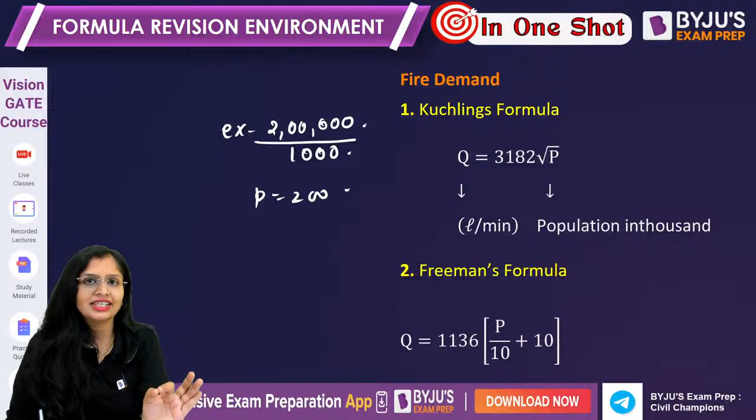As I told you, again, in every formula, P is population in thousands, discharge is in liters per minute. One more case, guys, I have told you this before also. If it is 1136.5, that time you will take here P by 5 plus 10. Otherwise you won't. Okay, remember that.

Then National Board of Underwriters formula. Guys, if the population is less than 2 lakhs, the formula is 4367 or 4637, guys? National Board of Underwriters formula. Is it 4367 or 4637? I made you solve it, so don't tell me that I haven't taught you. Come on, guys. Lashya, Yukta, everybody. Prince.

Good. 4637 root P (1 minus 0.01 root P). Here also you will get the discharge in liters per minute, and the population is in thousands.

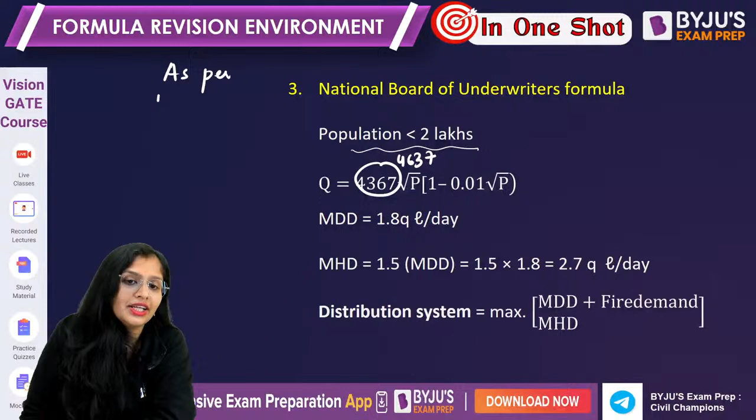One more formula, till now they have not asked, but if in GATE they want to ask, as per IS code, fire demand is given by 100 root P. Here you will get the fire demand in kiloliters, and the population will be in thousands. So put the population in thousands and you will get the fire demand in kiloliters.

Okay, prior to 2012 we used to use 97 root P. Right now we use 100 root P. So this is the formula for fire demand. 100 root P. Correct, Saurabh.

Now, next is maximum daily demand and maximum hourly demand. Maximum daily demand means out of 365 days in a year, there will be one day when the demand of water will be maximum. It is given by 1.8 Q. Ma'am, what is Q? Q is annual average daily demand. That means P population requires how much water in one day. If one person requires 200 liters of water, 5 lakh people will require how much? So 5 lakh into 200. Here I have denoted it by Q. This is not a hard and fast notation.

Okay, maximum hourly demand. Out of 365 days, there will be one day when the demand of water will be maximum. And in that day also, there will be 1 hour when the demand of water will be maximum. That will be known as maximum hourly demand. Technically, it is maximum hourly demand on maximum day. So this will be equal to 1.5 times MDD. Just substitute the value of maximum daily demand, 1.8 Q, and you will get 2.7 times annual average daily demand. So MDD and MHD.

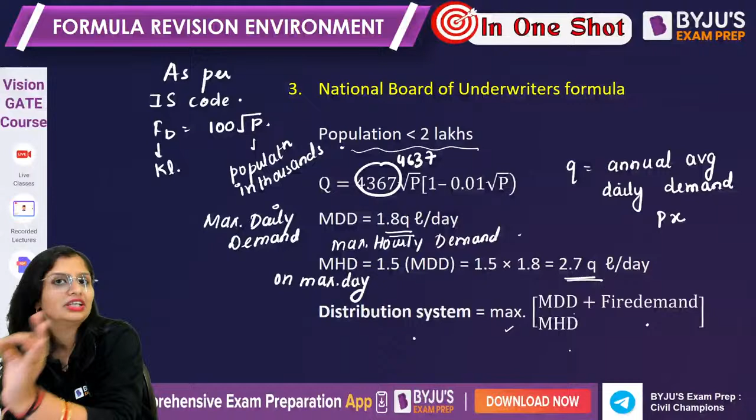So that hour on the maximum day is known as maximum hourly demand. So maximum hourly demand on maximum day. Clear? Okay. So for the distribution system, maximum of both of them.

Now, if you talk about population forecasting methods, what you are doing is predicting the population. Because when you design canals and all, you will design it for, let us suppose, 10 years, 15 years, 25 years. So you need to predict the population. Now you can ask me, ma'am, why are you not designing it for the existing population? It's pretty much sure that next year India's population will increase.

So if I'm designing it for the current population, it is pretty much sure that in the coming year the population will increase and my water distribution system will not be able to fulfill the requirements of the people. So it will become the failure of the engineer. That's why we forecast the population. We predict the population.

So the first method in this is the arithmetic increase method. Pn, I'm writing just once because for every other case it is the same. Pn is the population after n decades for which you are forecasting. Decades means 10 years; one decade is equal to 10 years. P naught is the last known population as per the latest record of census.

Census means Janganna in Hindi. After every 10 years they come to your home: how many people, how many are male, how many are female, how many are employed, how many are educated, all those things. So that is census. So last known population as per latest record of census. N is the number of decades and X bar is the average increase in population.

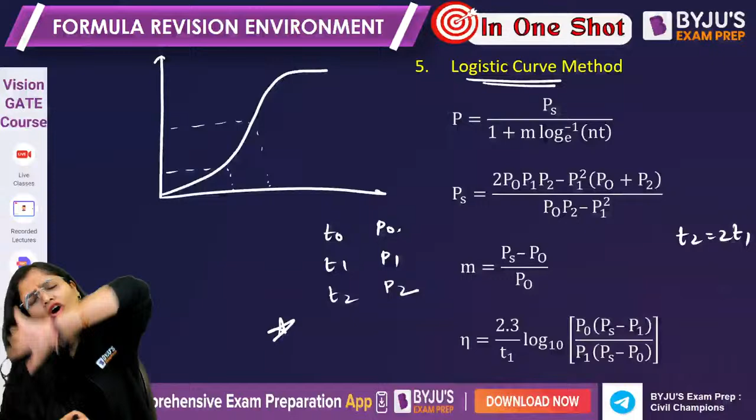I told you one thing. Logistic curve is valid when? Come on, guys, answer me. Logistic curve is valid when? Very good, Anwar. T2 is twice of T1, and all calculations are done from the base year. Out of all the population forecasting methods, it is only in the logistic curve method that all calculations are done from the base year. All the calculations.

Now, what is the formula? If you want to forecast the population, generally I don't write this formula. I told you to remember this one: 1 plus m e to the power nt, because this won't be possible for you to calculate in the calculator, right? So P is equal to PS over 1 plus m e to the power nt. And what is PS? PS is the saturation population: 2 P naught P1 P2 minus P1 square (P naught plus P2), over P naught P2 minus P1 square. So at T equal to 0, P naught; T1, P1; T2, P2. So this you have done.

Okay. Now m is a constant, which is saturation population minus initial population at T equal to 0, divided by initial population. n is again a constant, 2.3 over T1 log base 10. Guys, if you don't want to use log base 10, you can use this formula: 1 upon T1 natural log of P naught (PS minus P1) over P1 (PS minus P naught).

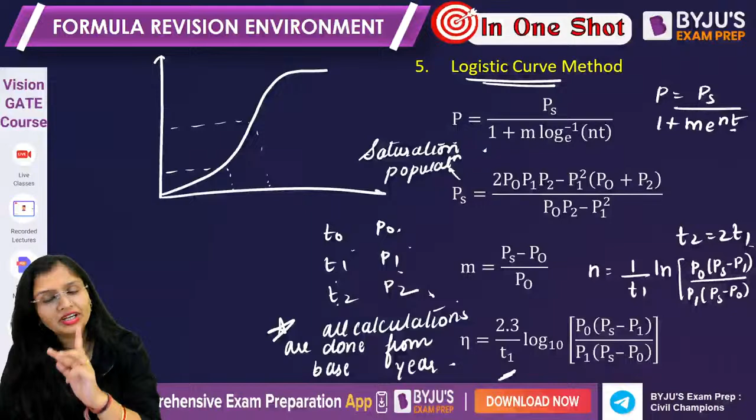Okay, this is the formula which you can use. Fine. So this is the formula which you can use. Now, obviously, if you want to use log base 10, you have done 2.3. That's it. Nothing else. Clear? So these are the simple formulas which you can apply and you will get the answer. I have put everything in decades everywhere. If I am putting decades here, I'll put decades here also. So every time, all calculations from base year. Remember that.

Okay. Any doubts from the first chapter? Now we are done with the first chapter, all the formulas. Any doubts? Quick. Hello, Prithvi. Any doubts from the first chapter, guys? Is my speed okay? Am I going fast? I just want one thing to know from you. Is my speed okay? Is my speed okay or am I going fast?

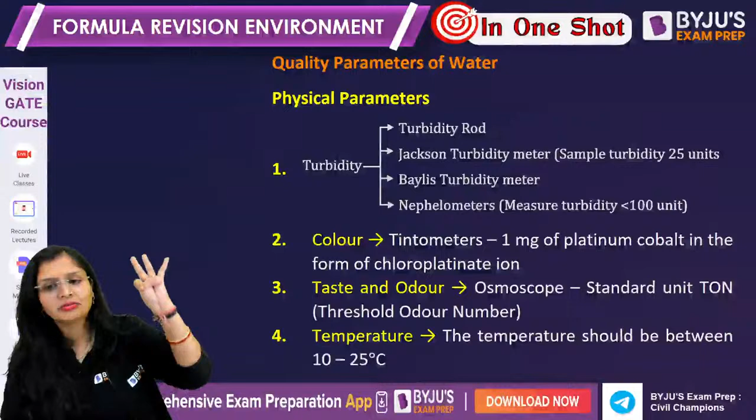Okay, fine. Now, talking about quality parameters of water, in a broader sense we have three types: physical water quality parameters, chemical water quality parameters, and biological water quality parameters. When you talk about physical water quality parameters, physical is something which you can touch, feel or see. So the first physical quality parameter is turbidity. Turbidity is basically the extent to which light is either scattered or absorbed. You have four methods in this: turbidity rod, Jackson's turbidity meter, Baylis turbidity meter and nephelometers.

Can you tell me, out of the four, only one is a field method? Which is a field method for calculating turbidity? Turbidity is the extent to which the light is either scattered or absorbed. More the suspended solids, more the turbidity. Lesser the suspended solids, lesser the turbidity.

How to get 30 marks in 10 days? I'll tell you how to get 30 marks in 1 day. Okay, wait for 1st of Feb or 3rd of February. Very good, Yukta and Anwar.

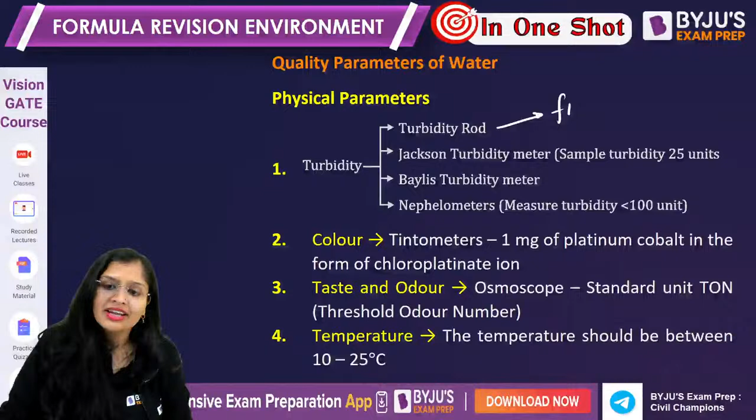Turbidity rod is the only field method to get instant turbidity. You put that rod, aluminium rod with a platinum needle, and you will get the answer. So turbidity rod is the field method used for measuring turbidity. Jackson's turbidity meter, you use it for natural water bodies because it gives you turbidity more than 25 units. Generally, turbidity more than 5 units is visible by the naked eye. So why use Jackson? For natural water bodies, you do it.

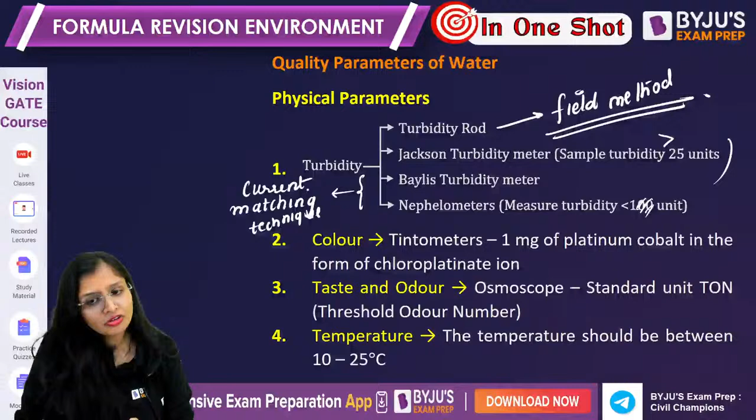Baylis turbidity meter and nephelometers can give you turbidity less than 1 unit. They are based on the matching technique, because while doing the measurement, you do the matching. Now, nephelometers: generally nowadays we put formazine in 1 liter of distilled water and check how much color is imparted.

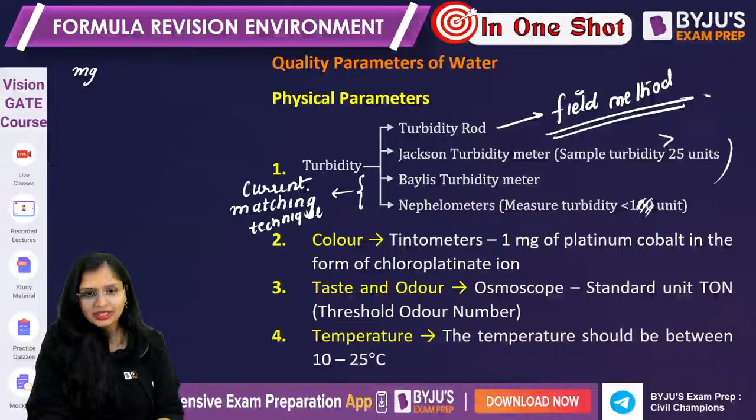So the unit, I told you this, again I'm repeating this question: mg per liter, ppm, NTU, FTU. Which one is the most appropriate, guys? I want the answer once again. Which one is most appropriate? Come on.

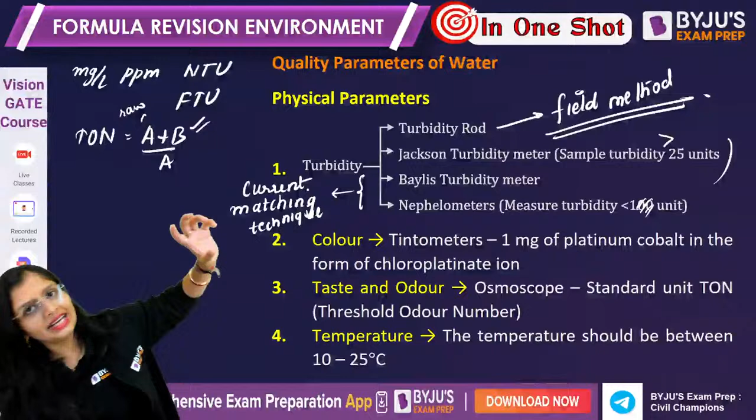Then talking about taste and odor. Obviously these are two different physical parameters, but we take them as one because the thing which imparts taste also imparts odor and vice versa. The equipment used is generally for odor, because you cannot taste the water, specifically if sewage is there. So the equipment used is the osmoscope, and the unit to measure the intensity is threshold odor number. Threshold odor number is (A plus B) by A, where A is the volume of raw water, and you keep adding distilled water, B, till no smell comes.

Talking about temperature, keep the range around 10 to 25 degrees Celsius. And always remember, whenever you take a sample, do the testing within 72 hours, meaning within 3 days. Why not after 3 days? Otherwise the biological and chemical parameters of the water will change. That is the reason, do it within 72 hours.

Now talking about chemical parameters, what do we have? We have total solids. Dissolved solids is basically a chemical parameter. Total solids is the summation of suspended solids plus dissolved solids. Suspended solids you can measure by gravimetric technique: take 1 liter of the sample and pass it through a filter paper.

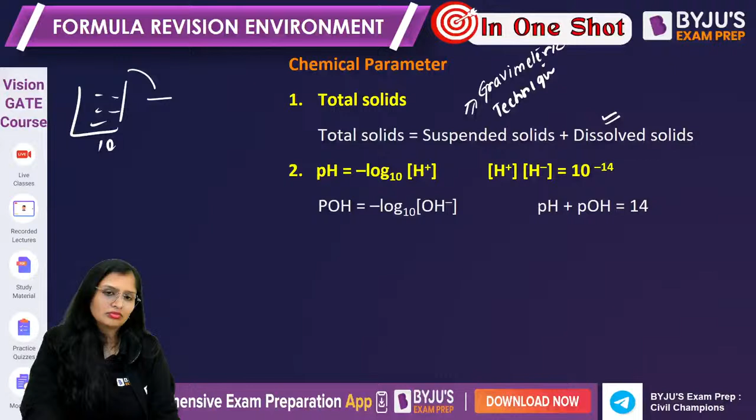Suspended solids will retain. Put it at 104 degrees Celsius for 24 hours. Water will vaporize, and you will get only suspended solids. Similarly, whatever sample has passed through the filter paper, whatever solids have passed through the filter paper, take it, vaporize it at 104 degrees for 24 hours; water vapors will go and you will get the dissolved solids.

Okay, now talking about TON, it generally varies from 1 to 3; that is wrong. I'll tell you that. Wait, at the end I will talk about it.

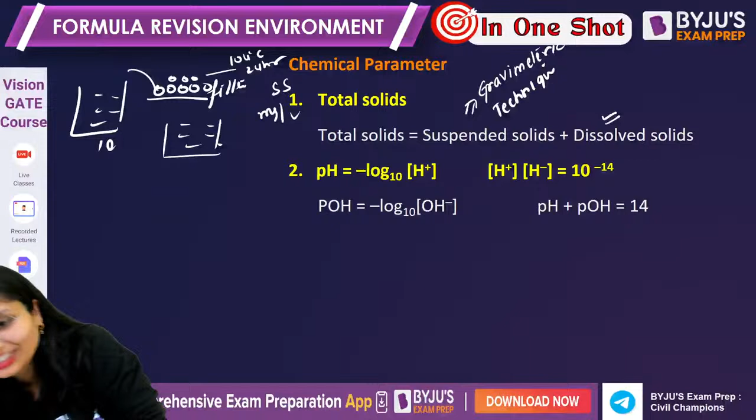Okay, so at the end I'll talk about the limits. Right now I'm not talking about the limits. pH will tell you the acidity or the basicity of the sample. pH is given by minus log base 10 of H+ ions, where H+ is the concentration in moles per liter. Similarly, if you want to measure pOH, that is minus log base 10 of OH- ion. OH- ion is again in moles per liter.

The summation of pH plus pOH will give you 14. And if you multiply H+ into OH- ion, it will give you 10 raised to the power minus 14. Very, very important, guys. The only thing where you can make a mistake: kindly substitute H+ and OH- in moles per liter. What is moles? Given weight upon molecular weight.

Suspended solids only inorganic particles? Suspended solids have both organic and inorganic particles. Who said it is only inorganic? Okay. So this is the number of moles per liter.

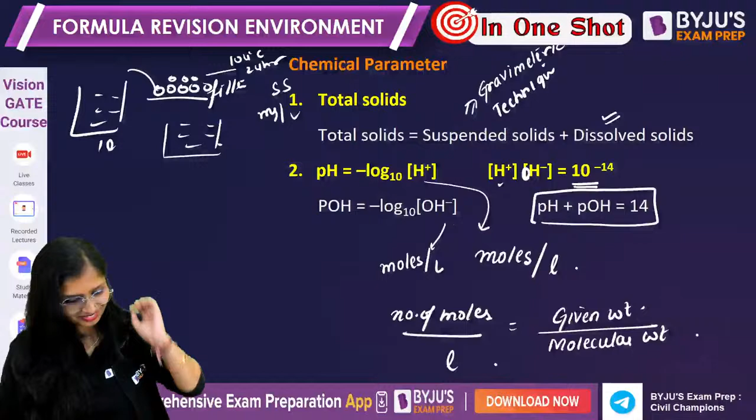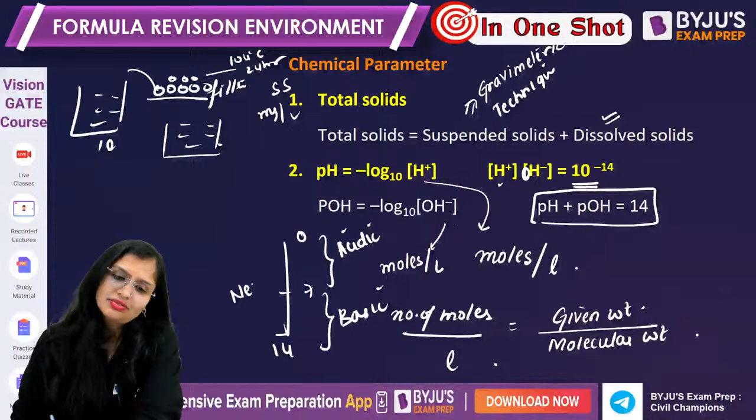pH tells you whether the water is acidic or whether the water is basic. How? If the pH falls from 0 to 7, you will call it acidic. And if it falls from 7 to 14, it is basic. And at 7, it is neutral. Okay, so this is the one.

Now talking about hardness. Hardness in water is due to the presence of what? Why is there hardness in water? Tell me the answer first. Hardness in water is due to the presence of multivalent cations. First of all, cations are positively charged ions.

Multivalent means... see, again a mistake, Saurabh, Prince, everyone's mistake. Meaning nobody told me correctly. Only Giri has told correctly. Shravan, multivalent cations, correct. First of all, cations are positively charged ions. I'm feeding it into your mind.

The reason I'm not saying calcium and magnesium is because if the question gives you aluminium and does not tell you to neglect the minor ion concentrations, then you have to consider aluminium also. So that's why I'm feeding it in your mind. It's not only calcium and magnesium. Predominantly it is due to calcium and magnesium, but that doesn't mean it is only due to them. So hardness in water is due to the presence of multivalent cations, those ions which have a valency more than 1 and are positively charged.

Now, hardness is further divided into two categories. Carbonate hardness, which you call temporary hardness, and non-carbonate hardness, which you call permanent hardness. Carbonate hardness, why? Because it's not given here. How is it not given? Okay, fine. Carbonate hardness is that hardness which can be simply removed by boiling or by addition of lime.

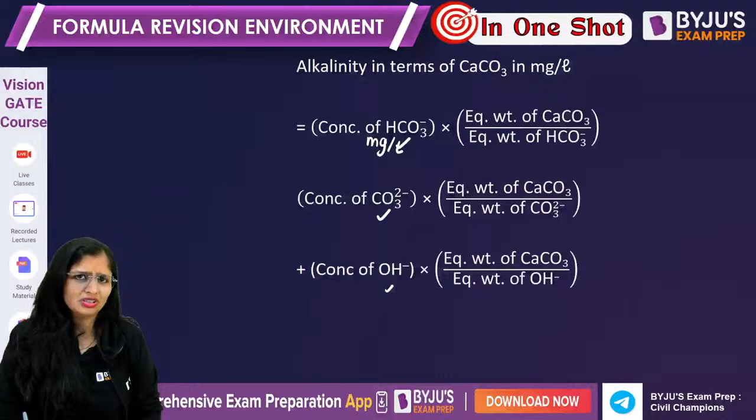Now you can calculate total hardness, I told you the formula. You can calculate alkalinity, I told you the formula. For carbonate hardness, you calculate total hardness and alkalinity, whichever is minimum, that becomes carbonate hardness.

If total hardness is less, non-carbonate hardness will be 0. Why? Because total hardness is carbonate hardness plus non-carbonate hardness. And if carbonate hardness equals total hardness, non-carbonate hardness will become 0 — there will be no non-carbonate hardness present in water.

If total hardness is greater than alkalinity, carbonate hardness is the minimum of total hardness and alkalinity. So carbonate hardness equals alkalinity, and total hardness minus carbonate hardness will be the non-carbonate hardness.

In a question, if they ask for 2 marks to calculate non-carbonate hardness, you still need to calculate total hardness, then alkalinity, then carbonate hardness, and only then can you get non-carbonate hardness. Remember clearly, there is no ready-made formula for non-carbonate hardness. You have to calculate total hardness and alkalinity first, then only you get non-carbonate hardness.

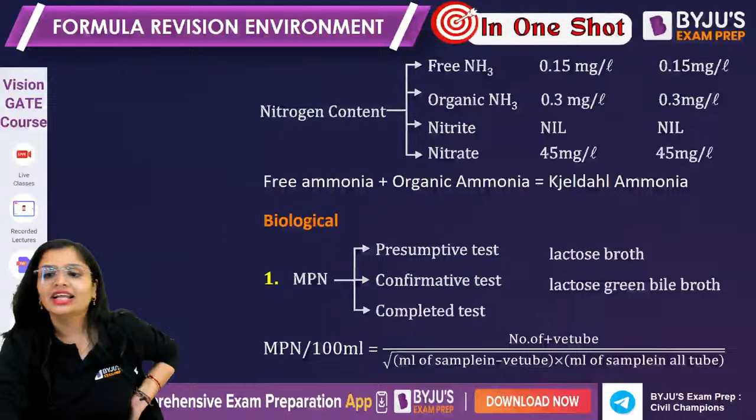This is the old limit which is now not being used. Nitrite and nitrate have the same limit. I told you about free ammonia.

Anwar is doing the advertisement of toothpaste now, good, they'll give you money. In BYJU'S platform, you're doing the advertisement.

Free ammonia indicates what — recent pollution, past pollution, what?

Recent pollution: organic ammonia will indicate the value before decomposition has started. Nitrite will give you the value of partially decomposed organic matter, meaning organic matter is still present.

So you cannot rely on nitrite, because here decomposition is going on, it's only partial. Nitrate indicates complete decomposition has taken place.

So 45 mg per liter is what you allow. If the value is more than 45 mg per liter, blue baby disease or methemoglobinemia takes place in infants. Remember that, it indicates past pollution.

Free ammonia plus organic ammonia is called Kjeldahl ammonia, or Kjeldahl nitrogen. Okay, these are the ones.

Now for biological parameters, you have the MPN test. In MPN you have three tests: presumptive, confirmative, and completed. Generally you don't test for pathogens, rather you test for coliforms, because presence or absence of coliforms in water indicates presence or absence of pathogens. Testing for pathogens is tedious and time consuming, so rather than testing for pathogens, you test for coliforms.

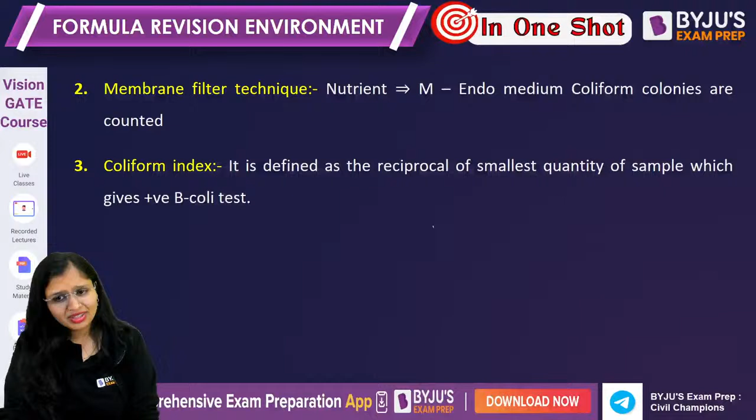Apart from that, you have one more technique, the membrane filter technique. In water you have both pathogens and coliforms. You pass it through a sterile membrane, where both pathogens and coliforms will be retained.

You place it in an incubator for 24 hours and give it food of M-endo medium, which is food only for coliforms. Those who don't get food will die; coliforms will get food and multiply.

You count the colonies of coliforms. By counting the colonies you have done calibration with the pathogens, meaning you're relating two different parameters. So although you are counting the number of coliforms, you are getting the value of pathogens, because you have done the calibration.

Clear? So these are the tests.

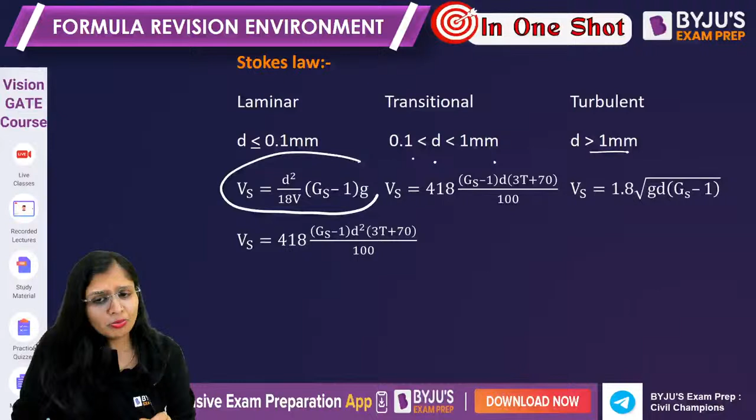The formula which is very important and used 99% of the time is D square upon 18 nu. This nu is kinematic viscosity, which is dynamic viscosity by density.

So D square by 18 nu, (Gs minus 1) into G. This is the formula. If in the question it is telling you to consider the effect of temperature, then use this formula. This is an empirical formula. You will get settling velocity in mm per second. You have to substitute dia in mm and you have to substitute temperature in degree Celsius.

Remember that. Now, if the flow is transitional, exactly the same formula; the only difference is in laminar D square is there and here D is there. Okay. And if it is turbulent flow, it is 1.8 root over G D (Gs minus 1). 99% of the time they have asked you this formula, so kindly remember this formula.

Now one more important thing. I told you that if dia is less than 0.1 mm, you have to go for this formula. Many a times, if you check out the PYQs, the dia is more than 0.1 mm. But if it is telling you in the question to assume Stokes law to be valid and to consider it laminar, although you know it is not laminar, if the question is telling you, you have to consider it.

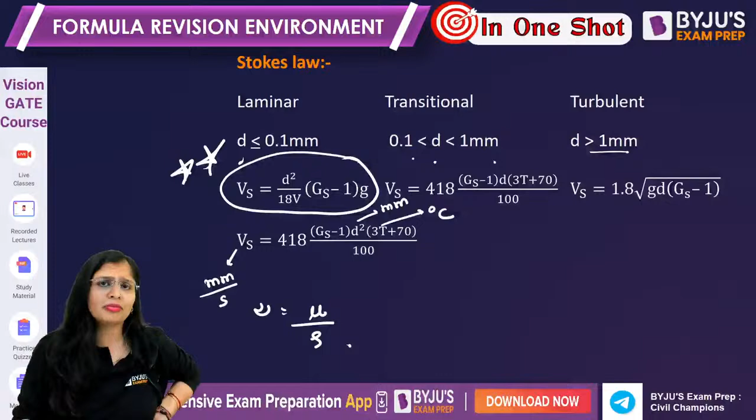Clear? So make sure you use this formula. Don't tell me, ma'am, you told us so we didn't use it. The question is telling you to assume it laminar, so you have to assume it laminar. You don't have any other options. Okay? So that's the thing.

Now, the next one is surface overflow rate. This is the velocity of the design size of the particle, the particle for which you are designing the sedimentation tank. Or you can call it the concern size of particle. This is given as Q upon BL. BL is the plan area, or surface area, length into width of the tank.

Now, two velocities are there: one is the flow velocity and one is the settling velocity. Velocity is discharge upon area, and you take the area perpendicular to the flow. So this is the cross-sectional area. So VF is equal to discharge divided by cross-sectional area, which is the velocity of flow.

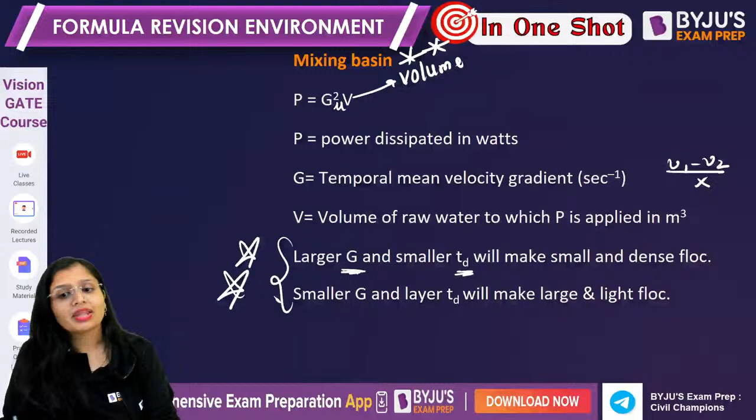Now, if you want to know the type of floc formed: if you have a larger temporal mean velocity gradient and smaller detention time, a question from this has already been asked. If G is more and detention time is less, you're keeping the water for a lesser time. The flocs will be dense and heavy, but the size will be small.

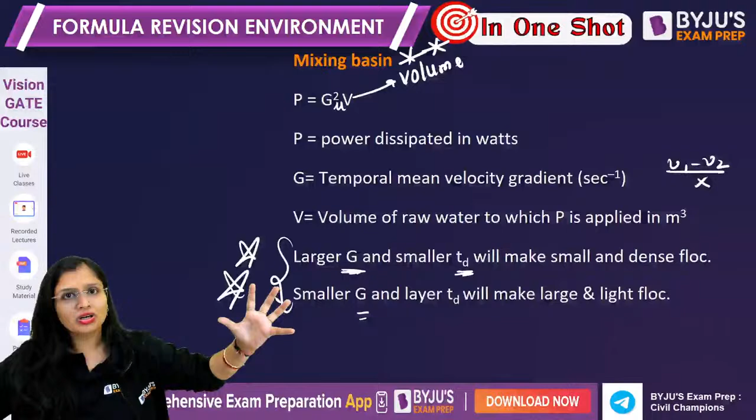If you are doing small intensity of mixing but giving a larger time for the water to be there, obviously the amount will be more, but their weight will be less. So large and light flocs. Clear?

Now, talking about filtration. What formulas are important? We are going to that. Filtration in itself acts like a complete treatment unit. It removes dissolved solids, color, suspended solids, organic matter, and microorganisms. So it itself acts as a complete treatment unit.

Generally we have slow sand gravity filters and rapid sand gravity filters. Why the names slow and rapid? Depending upon the rate of filtration. In a rapid sand filter, the rate of filtration is more as compared to slow sand. That's why the name is given.

Here, the head loss of the unexpanded bed and the head loss of the expanded bed are both the same. Can you tell me the reason? Till then, I'll bring water.

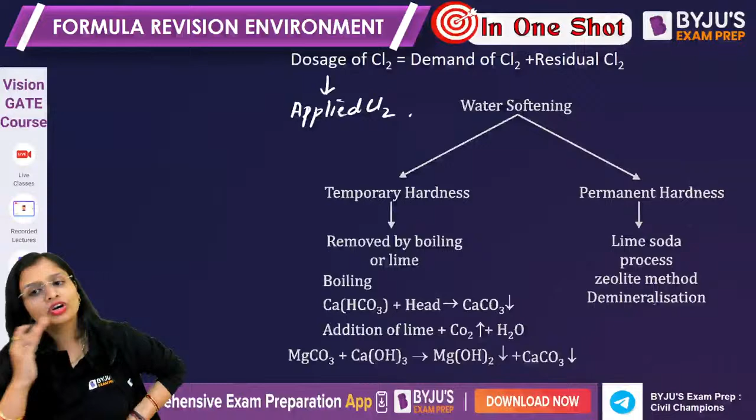So applied chlorine is equal to demand plus residual chlorine. Got it? Water softening I have already told you, and this completes your third chapter. Any doubts? Any doubts?

Any doubts? मेरा phone होने वाला switch off. जल्दी बोलो, any doubts? नहीं है?

चलो. Then we will talk about distribution and conveyance system. In distribution and conveyance system, we have four types: dead end system, gridiron system, radial system, ring system. Dead end system is also known as tree system. Gridiron system is also known as interlace system or reticulation system. Gridiron system is used for planned cities. Dead end system is used for a city which is developed in a haphazard manner.

Gridiron system has a large number of valves which are being used, but you can fulfill the fire demand. Here, apart from that, if any maintenance work is going on, you can get the water from other places. While in dead end systems, water gets stagnated. If you are not getting the water from one place, you don't have any other alternate source. Fire demands cannot be fulfilled, while in grid system it is done. Ring system also, you can get all the benefits of gridiron system.

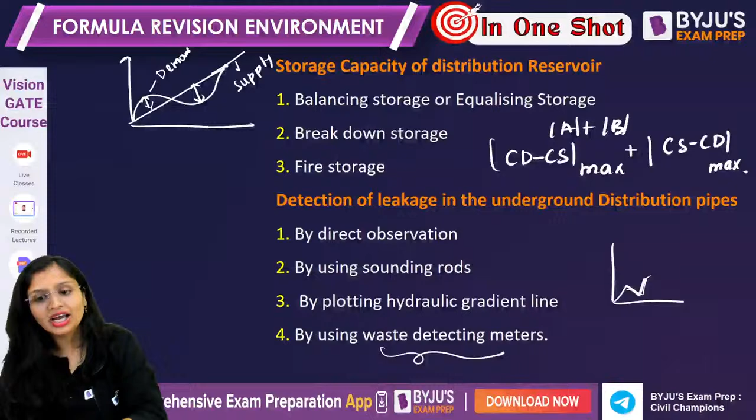Okay. Now talking about pipe appurtenances, this they can ask you in different manners. They will give you the name of the valves and the functions they will perform, match the following, or they will give you the function and 4 options: identify the type of valve. So this question is not much popular in GATE, but very popular for ESE and your state level examinations. But if they want an MSQ, they can ask you this, because this is one of the statement wise questions.

Okay, so sluice valve or gate valve, or there's one more name, cutoff valve. These are used to regulate the flow of water. Proper regulation: when you're stopping the flow, water hammer effect should not take place. For those reasons, you place the sluice valve. Generally, you place it at the summit point. The reason for placing it at the summit point is the pressure to be resisted is less.

Ma'am, so what if pressure is less? You can use a moderate quality material. Now, if it has to resist a large amount of pressure, that time you need to have a durable material. Otherwise, you can go for a moderate material also.

Okay, air valve or air relief valve. I told you technically there are 2 types of valve: air relief valve and air inlet valve. When excess of air pressure is there, more than the predetermined pressure, you have air relief valve, or you call it as air release valve, so that excess of pressure goes out. If the pressure is less than the predetermined pressure, negative pressure will come. And if negative pressure will come, that is also a problem.

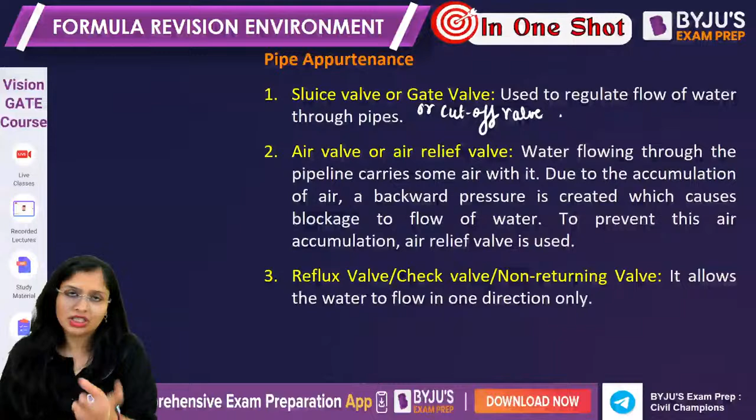Very good, Shravan. Then you have reflux valve. You call it as check valve, or you call it as non-returning valve. We don't want the water to flow in the backward direction. Otherwise, failure of the pumps or damage of the pumps can take place. So these valves are installed so that the water flows only unidirectionally, only in one direction.

Apart from that, other valves are there. The most important ones were this one: first, second, third, and this one, fourth. The ones which are many times asked: scour valve, blow off valve, drain valve. Because obviously when water is coming, it will carry the sediments with itself, and the sediments will deposit on the pipeline.

So time to time you need to do the cleaning also. So you have these valves, these are manually operated. So over time, when you do the maintenance work, what you do is, air valves are automatic in nature. Air valves are automatic in nature. Reflux check valves are also automatic in nature, because हम थोड़ी ना बार बार देखेंगे pressure कितना है air का. You don't do that, right?

So that is why. Now, when you talk about scour valve, blow off valve, or drain valve, these valves are used to remove the sand and silt particles if they are there. These are manually operated. Time to time when you do the cleaning, you just place it. Then you have foot valve. You don't want any foreign impurities or debris to come. So foot valve. Butterfly valve, globe valve, same function.

Remember, function is same, mechanism is different. Sluice valve, gate valve, cutoff valve, butterfly valve, globe valve. All of them have the function to regulate the flow of water. Only thing is mechanism is different. Then needle and cone valve is there. Ball float valve. I told you about floating.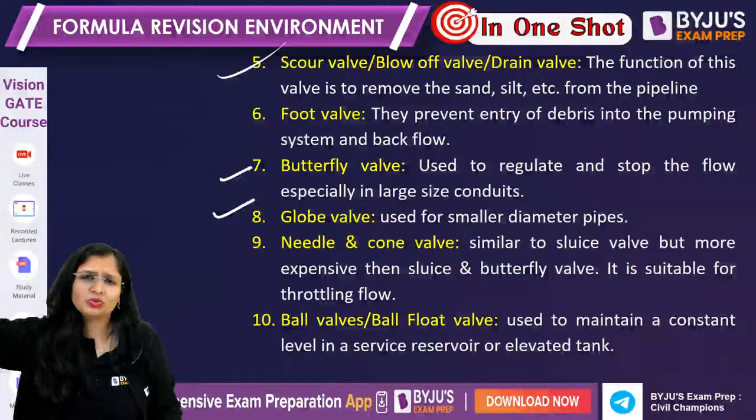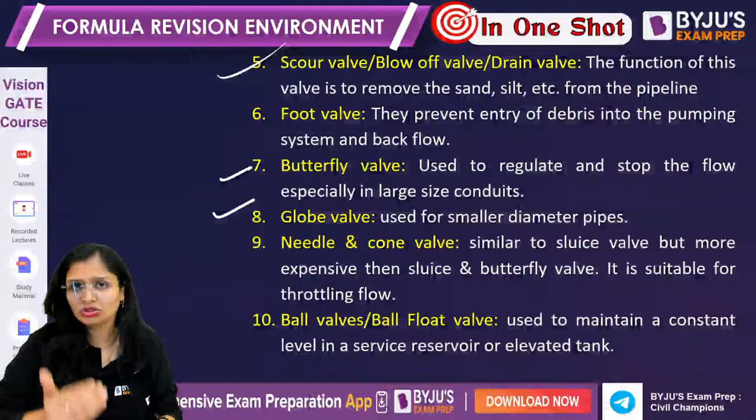So there also you have this float, that is a very light material, so that it can allow a predetermined water only, not more than that. So there you have it. Pilot valve, जहाँ पर भी wherever you have high pressures, you use this. Flush tanks also you have it. Pilot valves, you use it in places of high pressure. Stop cocks, generally you have them in wash basins and all, there you use it.

Water meters, whenever you want to measure the quantity of water, at that position you place these water meters. Just like you have electricity meters, in that same pattern you have water meters also. Fire hydrant, whenever you need to supply water when an outbreak of fire takes place, you have an outlet which is provided. You might have seen firefighting people, that is placed near the main water line, so that they connect their pipeline to the fire hydrant, and then they get the water. So wherever main pipelines are there, this fire hydrant is placed.

So these were the distribution and conveyance system. Any doubts? Any doubts?

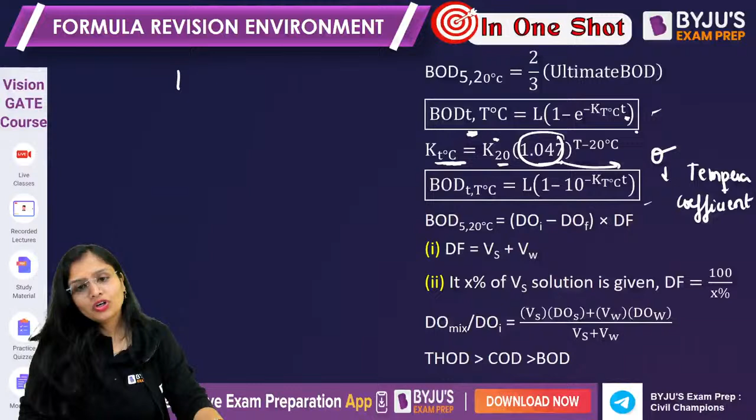And if you want to calculate the BOD remaining at any time t, how much is remaining - this much is remaining.

And for 5 days BOD, you calculate DO initial minus DO final into dilution factor. Ma'am, how can you calculate initial and final DO? By Winkler's method. Dilution factor is how many times the sample is diluted - kitna paani milaya aapne. This equals volume of sewage plus volume of water, divided by volume of sewage.

In questions nowadays, they generally say 2% solution, 4% solution. Don't overthink it - it's 100 by x%. This will directly give you the value of dilution factor.

Now suppose there is a volume of sewage with its dissolved oxygen, and you are adding water to dilute it, which has its own dissolved oxygen. So the initial dissolved oxygen becomes DO mix. What will it be? Volume of sewage times DO of sewage, plus volume of water times DO of water, divided by volume of sewage plus volume of water. So this is another formula for calculating DO mix.

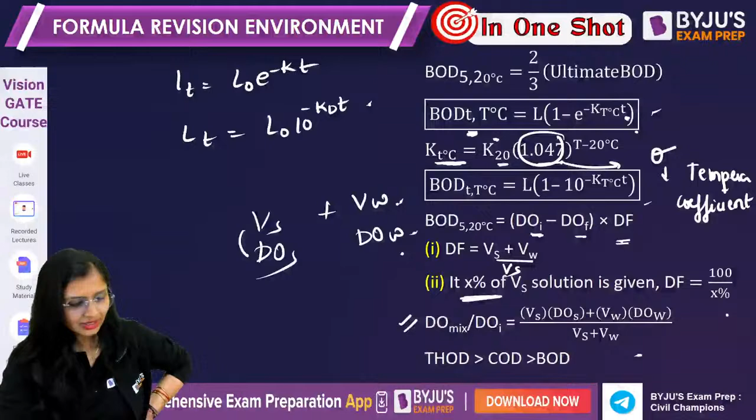Kyunki ab paani mein ho gaya mix, ab sewage mein mix ho gaya paani. Theek hai, chaliye. Now this is important - population equivalent and relative stability. Population equivalent, as I told you, it is not possible to directly calculate how much pollution industries are generating.

We measure pollution in proportion to how many people are generating it. So it is total domestic or total industrial waste BOD divided by BOD produced per person per day. In GATE, 99% of the time they will give you the BOD produced per person per day. But if it is not given in the question, it is 80 grams per capita per day, or you can write it as 0.8 kg.

Now look, this is the standard value. If in the question... some people are such great people, I don't know what to say, you'll laugh. There was one question in a test series where I told you the standard BOD is 80 grams per capita per day. In that question, it was given as 75 grams per capita per day, but students still wrote 80 grams per capita per day. I told you that generally, if nothing is mentioned, take this value, but when the question gives you the value, take that value. Why are you using your own logic? And then they say, 'Ma'am, you told this thing,' sending me screenshots on Telegram saying 'Ma'am you told this, look I did the same, but it didn't match.' I read the question, checked it, and it was right there - 75 grams per capita was given, so why the hell are you writing 80?

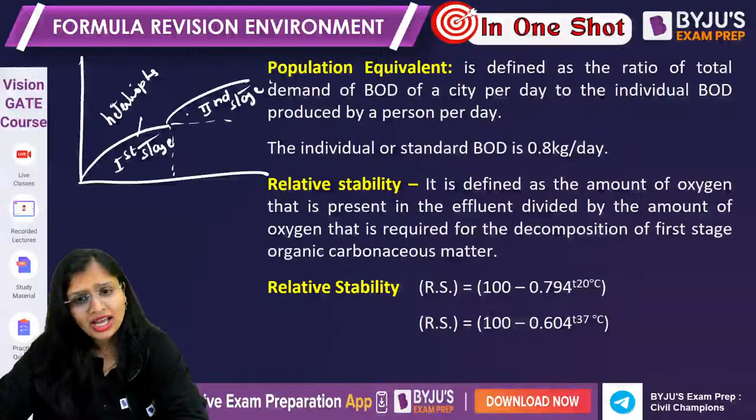What causes first stage BOD? Here heterotrophs do the decomposition - this has already come as a question in GATE. And second stage BOD is done by autotrophs. Heterotrophs utilize organic carbon, autotrophs utilize inorganic carbon, and taking out that inorganic carbon takes time. That's why before autotrophs extract the inorganic carbon and do the decomposition, heterotrophs have already done their function.

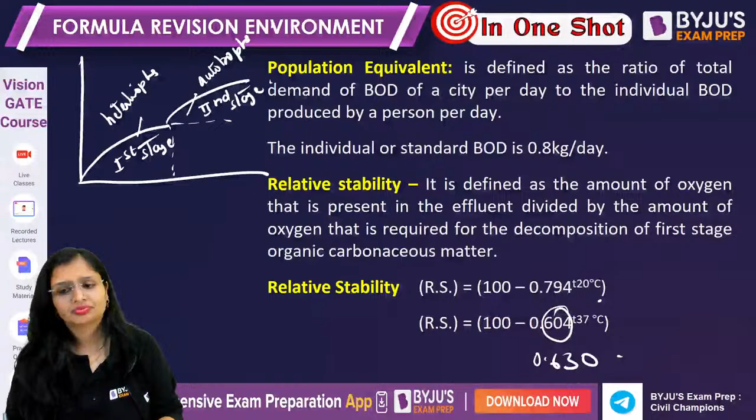Relative stability has two formulas: 100 minus 0.794 to the power T for 20 degree Celsius, and for 37 degree Celsius it is 100 minus 0.604 - wait, that's wrong, it should be 0.630. T20 and T37 are the time required in days for the decolorization of methylene blue colored solution when incubated at 20 degree Celsius and 37 degree Celsius respectively. Very good, Shravan - 0.630 is correct, remember that.

Any doubts in this chapter?

Now we have moved to the sewerage system. We will design sewers. Any doubts? We have three types of sewerage systems. The sewerage system handles distribution, conveyance, and transportation - basically everything is done through this only. So we have separate sewerage system, combined sewerage system, and partially combined or partially separate sewerage system.

In a separate sewerage system, you have two different pipes - one for domestic sanitary sewage and one for storm water. Storm water is rainwater flowing on the surface. Generally, water from the storm carries only inorganic particles. So if you have two different pipes - one for storm water, called drainage, and one for sanitary sewage, which is domestic plus industrial sewage - having two different pipelines is called a separate system.

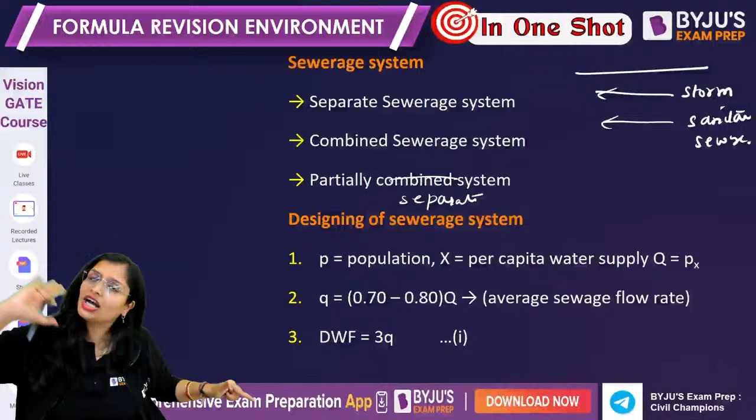If you have one pipeline for both, it is called a combined system. Partially separate is when water collected from the rooftop of your building and courtyards is allowed into the sanitary sewage pipe, while other rainwater goes to the storm water pipe. This is known as partially separate, because it is practically not possible to collect all the water from the rooftop and similar sources.

Clear? That is the reason. This is a designing question, don't worry, they'll mention it in the question. If P is the population, now check it out. If X is per capita water supply, then total water demand will be P into X, which you call as capital Q.

Then you assume that 70 to 80% of whatever water is supplied will convert into wastewater. In GATE, they will mention this to you, so there is nothing like assuming. This is for ESE conventional. If in the question, rather than giving per capita water supply, they give sewerage water supply, then there is no need for 70 to 80%, because the sewerage water is already given.

Dry weather flow, this is the sanitary flow. You take the factor of safety, basically you design it for branch sewer. If nothing is mentioned, you have lateral sewer, branch sewer, main sewer, outfall sewer - you design for branch sewer, so you take 3 times the value.

Now here you have storm water also. Storm water discharge is given by the rational formula, 1 by 36 K P C A. K is the runoff coefficient, which is the ratio of runoff by rainfall. PC is the critical rainfall intensity in centimeter per hour. Remember, this is very important.

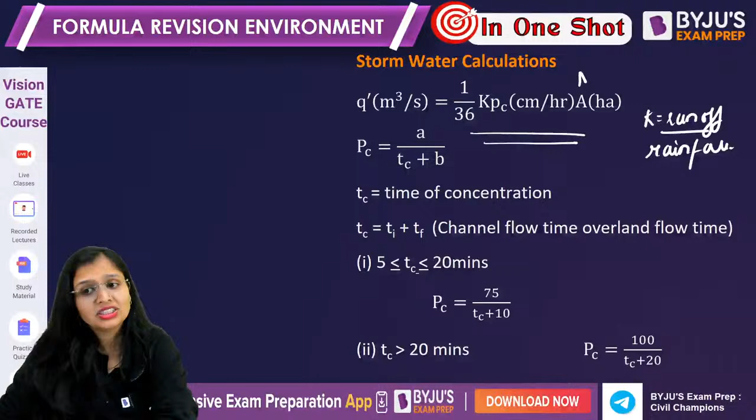You make mistakes here. A is the catchment area in hectares. I don't know why you put kilometer square - it is in hectares, remember that.

Critical rainfall intensity will generally not be given directly in the questions, so it is a function of time of concentration. What is time of concentration? It is the time taken by the farthest or remotest point of the water molecule to reach the outlet. That time which it has taken is known as time of concentration. It is the sum of channel flow time, or time of entry plus time of flow.

If time of concentration is 5 to 20 minutes, use 75 Tc plus 10, with Tc in minutes. If time of concentration is greater than 20 minutes, use 100 Tc plus 20. You will get the answer directly in centimeter per hour.

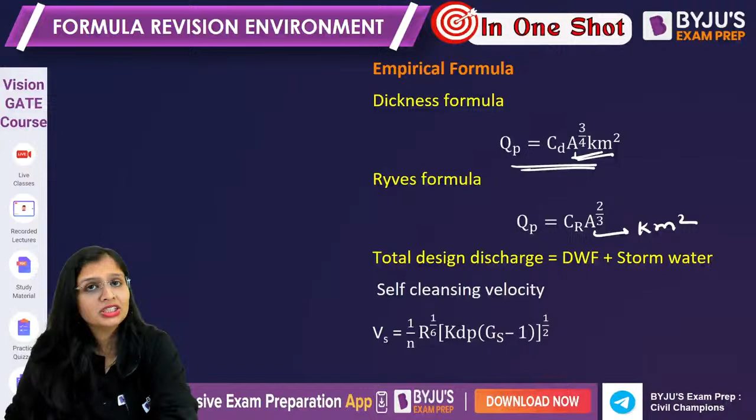Apart from that, there are empirical formulas also, like Dickens formula, CD A to the power 3 by 4. Remember, here A will be in kilometer square. Ryves formula, again here it will be in kilometer square. One way to remember: if you forget 3 by 4, think 3 plus 4 equals 7 - Dickens has 7 alphabets. Ryves, 2 plus 3 equals 5 - Ryves also has 5 alphabets. So don't forget.

Total discharge will be dry weather flow, that is the sanitary sewage, plus storm water. This gives you discharge. Discharge is equal to area into velocity. In the question, if they ask for diameter, you calculate discharge, velocity will be given, and you will get the diameter.

Clear? Now there's one more formula, self-cleansing velocity. Generally we design sewer for open channel flow, meaning the water flows under the action of gravity. So you design the sewers such that silting should not take place first, and if any particles have settled, that minimum velocity should carry out the cleaning of that particle.

So the formula is 1 by n, r to the power 1 by 6 - let me write it clearly so you don't get confused. R is hydraulic radius, which is the ratio of wetted area to wetted perimeter. K, dp is the particle size, (gs minus 1) to the power half. N is Manning's roughness coefficient, dp is the particle size, and gs is the specific gravity. This is again important.

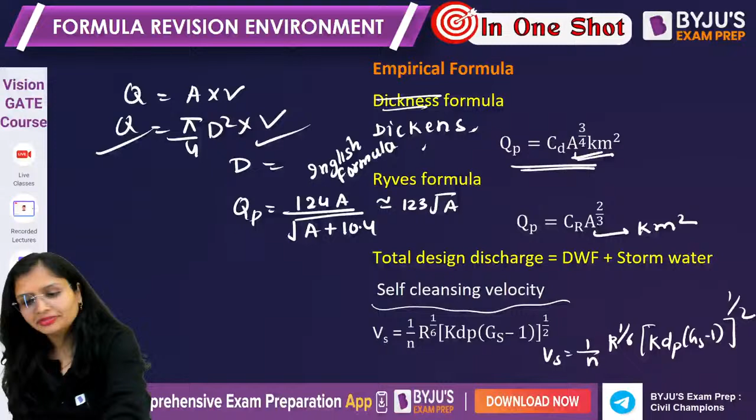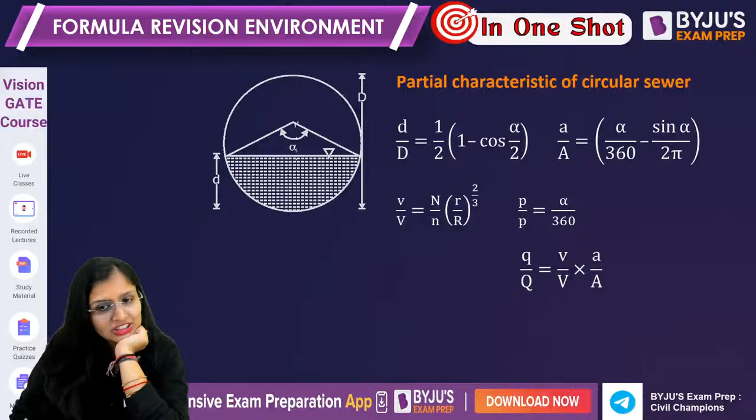Okay? Let's go. Now it's not generally necessary that the water will be flowing half full. Obviously it can flow less than half full. So full depth is equal to the diameter of the sewer and partial depth is equal to small d. So if you want to calculate, alpha is the angle which is being subtended. So small d by capital D is equal to half (1 minus cos alpha by 2). Okay, so the partial depth to the full depth.

Area of this wetted area to the full area is alpha by 360 minus sine alpha by 2 pi. Perimeter, small p to capital P is alpha by 360. Velocity is capital N by small n, small r by capital R to the power 2 by 3. Remember this. Velocity and discharge will follow automatically.

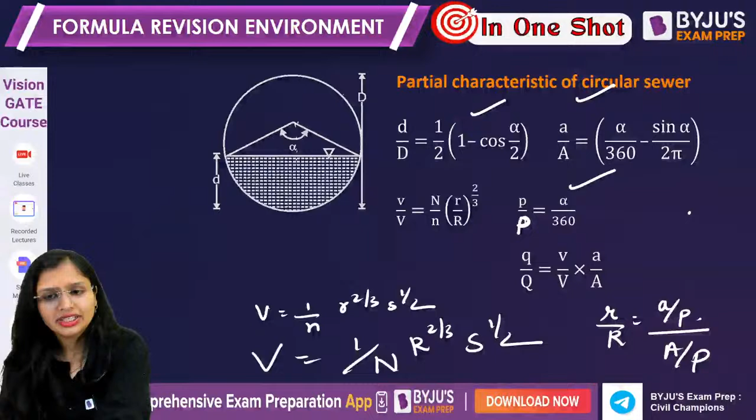So why to remember more formulas? Just remember these three formulas. That's it. Don't expect to remember more formulas. It's not 123 a, it's root a. Root a will come. Okay? So just remember these three formulas. That's it. The rest you can calculate. Now this is important.

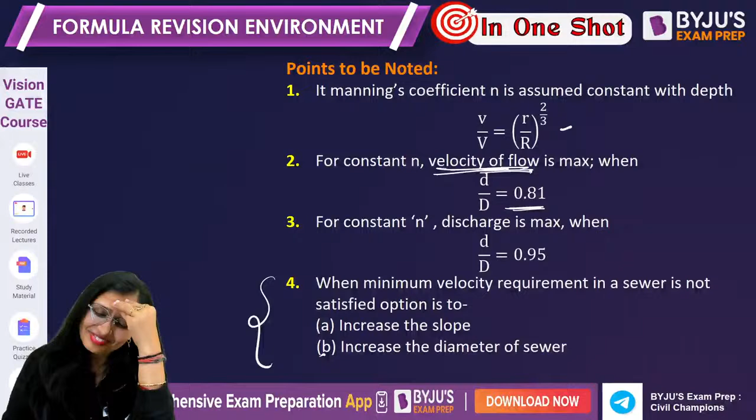Minimum velocity requirement in sewer is not satisfied. What you can do is either increase the slope, so that, see, if the slope is like this, water will flow with a smaller velocity. If you will increase the slope, water will flow at a higher velocity. So if the minimum velocity you are not able to maintain, increase the slope or increase the dia of sewer. Okay, do it anyway. Fine.

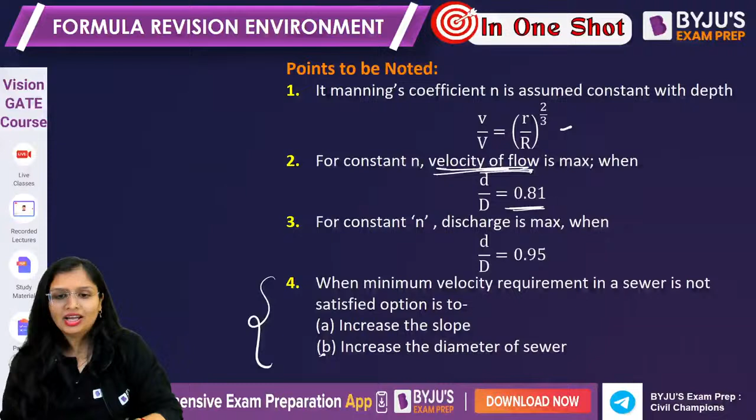Now, equal degree of self cleansing velocity, one statement, answer me. If you want equal degree of self cleansing velocity, dash should be same. Can you tell me what should be same? I'll bring my phone, it must be charged. If you want equal degree of self cleansing velocity in two different sewers, dash should be same. Tell me what that dash is.

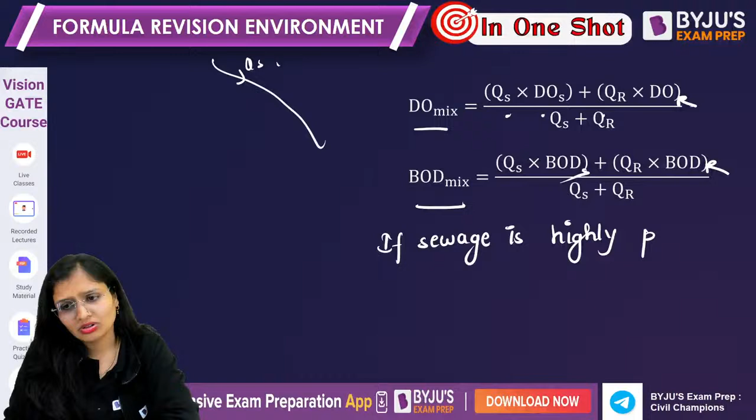Two things I just have to tell you here. If sewage is highly polluted, this word is written, DO of sewage will become how much? If sewage is highly polluted, DO of sewage is what? It will not tell you in the question. You have to apply your brain. Highly polluted, oxygen is exhausted, 0. You have to apply your brain.

If river is fully saturated with dissolved oxygen, that means BOD of river is 0. Fully saturated means whole oxygen is present. Why? If DO saturated, that means no organic matter is there. So if no organic matter is there, BOD will be zero. Remember these both things. Now this is the value. I already told you as the temperature increases, DO value will decrease.

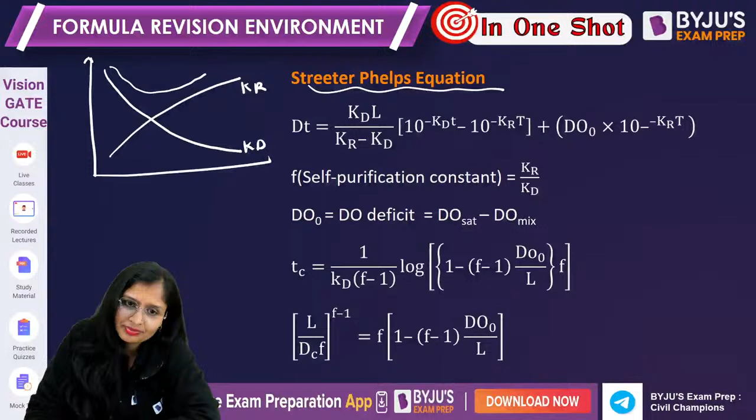Streeter-Phelps equation. So first, let me draw. This is deoxygenation rate constant Kd. This is reoxygenation rate constant Kr, and this is the resultant. So if you want to calculate the deficiency of oxygen after t days, what is the formula? Dt = Kd L / (Kr − Kd) × (10^(−Kd t) − 10^(−Kr t)) + D0 × 10^(−Kr t).

Kd is deoxygenation rate constant, Kr is reoxygenation rate constant, D0 is the initial DO deficit, which is equal to DO saturated minus DO mix. What is DO mix? I just told you before. Now let me do the critical one, and this one at any time t, which you are calling Dt. Critical DO deficit is the maximum; deficiency cannot be more than that. That is the maximum deficiency possible. So you will get the critical deficiency at critical time.

So that critical time is given by 1 upon Kd (F minus 1) log [1 minus (F minus 1) DO naught by L into F]. L is not here the length. This is the ultimate first stage BOD. Remember this, don't mark it as length. Ultimate first stage BOD. F is purification factor, self purification constant also, which is the ratio of Kr by Kd.

Okay, now if you want to calculate, there are two ways: one is this manner, and another formula not written here, L by F 10 raised to power minus Kd Tc. So if the question asks you to calculate critical DO deficit, one formula is this, and one formula is this, with the help of which you can calculate critical DO deficit. L by F 10 raised to power minus Kd Tc.

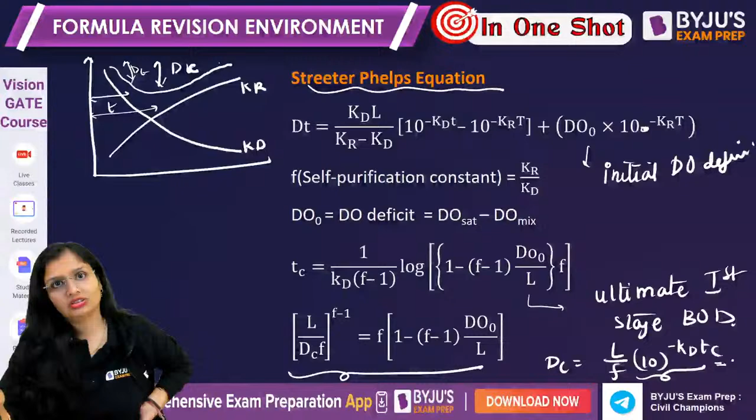This formula looks small, but remember Tc you have to calculate by this formula. And remember that you have to do it in the virtual calculator. So when you are doing it, make sure that you apply proper brackets, because nazar hati durghatna ghati. Even one wrong thing and your whole answer will become wrong. So if a Streeter-Phelps question comes, do a proper check on the brackets.

Okay, sure. Any doubts in the disposal of sewage chapter? Now we have gone to the third last chapter, that is treatment of sewage. Any doubts? Any doubts? Sure.

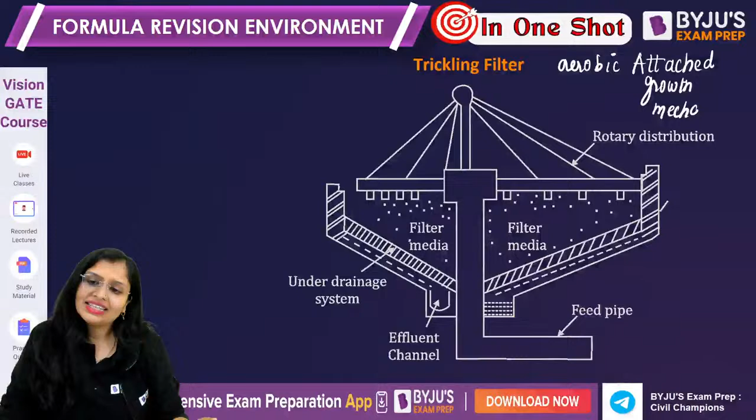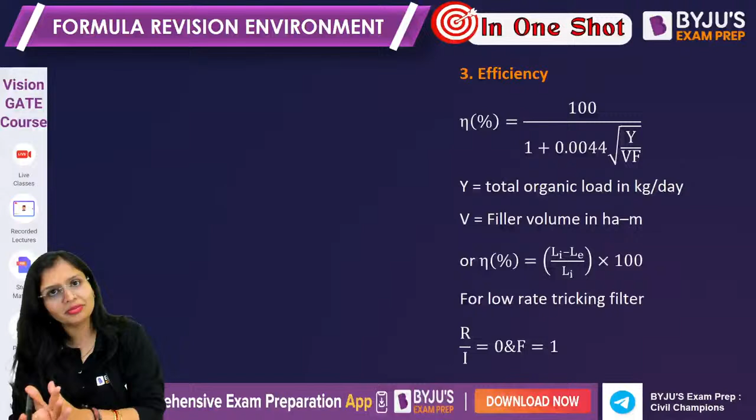Now, biological treatment, we'll go for trickling filter. Trickling filter is aerobic because decomposition will be done in the presence of oxygen, and this is an attached growth mechanism. Attached growth mechanism means you will give the microorganisms a medium for the attachment of biomass, and then the decomposition will be carried out. I don't have to teach theory here. First, you are giving time for the microorganisms to get attached in the filter media, and then you will be carrying out the decomposition of organic matter.

So this is the formula of efficiency. What we have done already in the marathon: 100 upon 1 plus 0.0044 root U, where U is organic loading rate in kg per day per hectare-metre. If you want to do it in terms of cubic metre, I told you 100 upon 1 plus 0.44 root U, U in kg per day per cubic metre. Here F in case of standard rate trickling filter is 1 because recirculation ratio is 0.

If they ask you efficiency, that is influent BOD minus effluent BOD divided by influent BOD into 100. So there are two formulas for calculating efficiency. If they ask you to calculate volume, just compare both and you'll get the volume. This is for the low rate, generally called standard rate, trickling filter. Here you are not doing any recirculation, so recirculation ratio is 0, recirculation factor is 1.

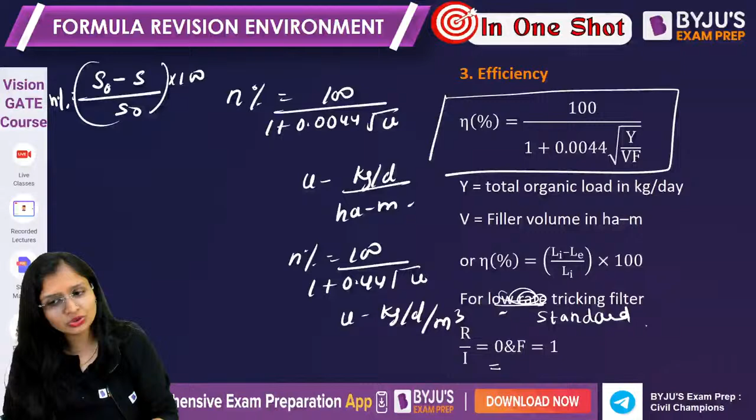Remember recirculation ratio, some people denote it by R, which is QR by Q naught. Recirculation factor is denoted by F, which is 1 plus R upon (1 plus 0.1 R) whole square. Kindly read the question carefully, whether recirculation ratio is given or recirculation factor is given. If you make a mistake, the whole answer will be wrong. Remember that.

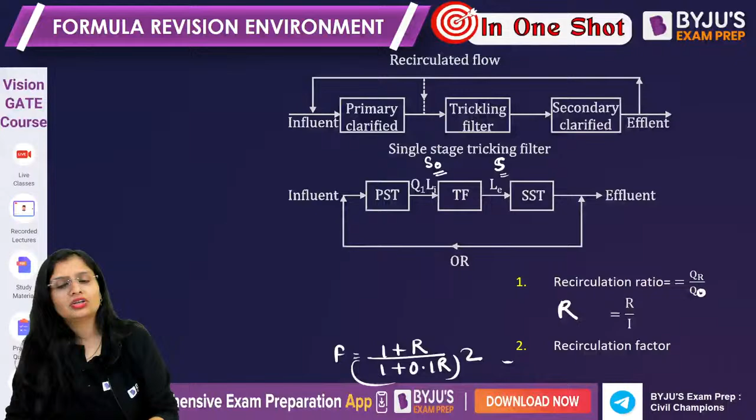Now, here they have taken Li. Generally the denotation we take is S naught and S. For influent BOD we take S naught. For effluent BOD we take S. And we are recirculating a part of it. Chalo. Oxidation pond.

It itself acts like a complete treatment unit: suspended solids, digestion of sludge, everything it does. Drawback: a large area of land is required, 0.5 hectares to 1 hectare. Minimum 2 हफ्ते चाहिए होते हैं. Minimum large detention time, minimum 2 weeks, generally 20 to 30 days. Depth 1 to 1.5 meters.

Organic loading rate, the rate at which organic matter is loaded into the pond, is 300 kg per hectare per day. Detention period, अब ये important है. पूछा नहीं है, but अगर पूछ लिया तो detention period is 1 upon KD log base 10 of L upon L minus Y. L is the BOD which is going into the pond and Y is the BOD which is removed. ध्यान रखना, यही गलती करते हो. Y is the BOD which is removed.

For example, L, the one which is going in, is 300 mg per liter. The one which is coming out is 30 mg per liter. So don't put 30. How much has been removed? 300 minus 30, 270. So this will be Y. That is the only mistake you can make here.

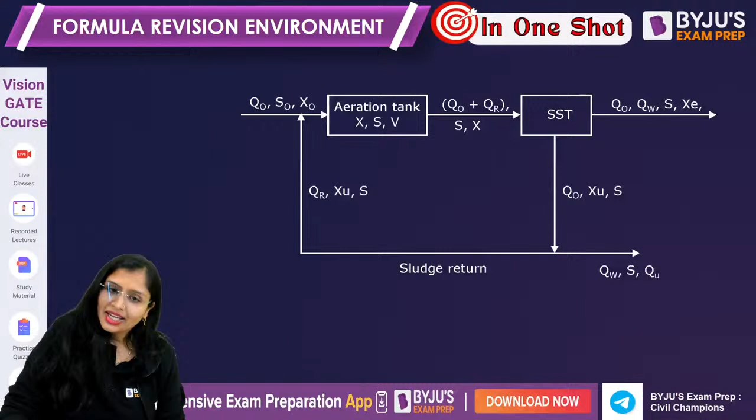ठीक है. चलिए. Our favorite activated sludge process, ASP. I have told you, in any unit, if you don't put a secondary sedimentation tank, it will not cause much impact. But if you don't put it in ASP, ASP will not function at all. So this is the system we talk about. Q naught is the discharge, S naught is the influent BOD, X naught is the microorganisms. Here S is the BOD which is coming out. We assume that no removal of BOD takes place in the SST. In actual it takes place, but here we are assuming that no removal takes place.

Okay, so Q naught, XU. इसमें कुछ चीजें गलत लिखी है. QU is the useful sludge. Out of that useful sludge, a part of sludge is recirculated and a part of sludge is wasted. And this will be QE, which is Q naught minus QW. So I'll explain the diagram first, फिर everything is easy.

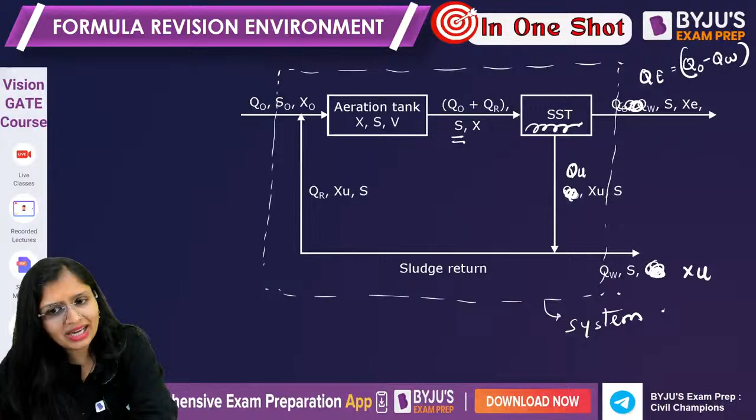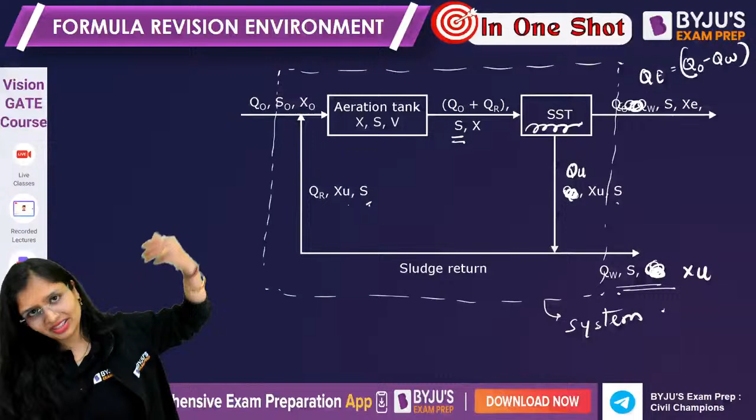Q naught is the discharge going in, S naught is the BOD going in, and X naught is the microorganisms going in. This is V, the volume of the aeration tank, in which decomposition will take place. The sludge will settle here. A part of the sludge will be recirculated back. It has a high concentration of microorganisms XU, and the BOD will be S. We assume that no BOD removal has taken place in the SST, so here also S, everywhere you will get S only. And this is the sludge which is wasted, taken to the sludge thickening tank, sludge digestion tank, and then sludge drying beds.

Now here you have a few parameters which you need to remember. First is the aeration period, the time for which you are supplying oxygen in the tank. Time is volume by discharge: volume of the tank divided by the rate of sewage flow in the tank. This is the aeration period.

Food to microorganisms ratio, how much food you are giving. Food means organic matter. If S naught in mg per liter is the food, in the whole discharge Q, how much will be the food? Divided by microorganisms. X is the MLSS concentration, mixed liquor suspended solids. Mixed liquor means sewage sample. If X mg per liter is present, in the whole volume how much will be present? So Q S naught upon V X. This is the food to microorganisms ratio: how much food you are giving and how much microorganisms are present.

More the food, lesser the microorganisms, efficiency will be more or less, guys? खाना ज़्यादा है, खाने वाले कम है. Efficiency more or less?

Obviously less. Because food is more, it is not getting decomposed. Vice versa: food is less, microorganisms are more.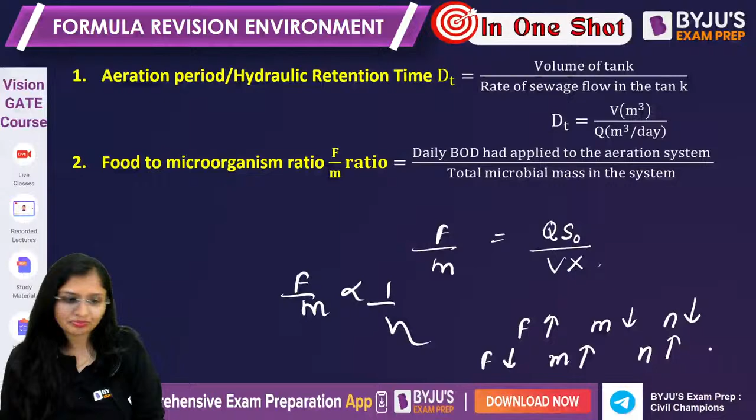Efficiency will be more. So food by microorganisms inversely governs the efficiency. Clear? Good. Now volumetric loading or BOD loading: how much BOD you are putting to the volume of the tank. This is known as volumetric BOD loading or organic loading.

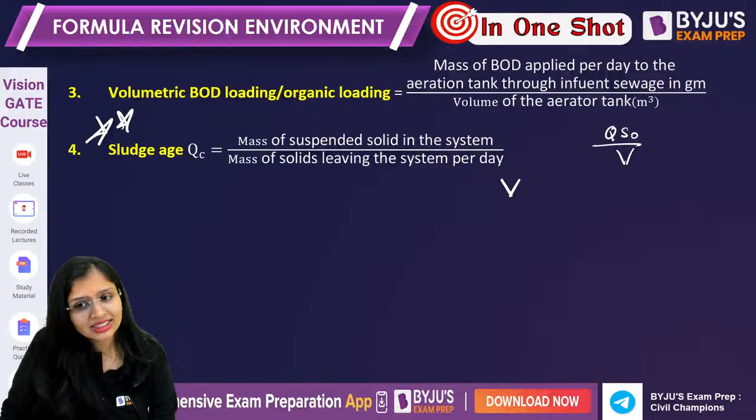Important, sludge age. The time for which the microorganisms remain in the system, you call it sludge age. There's one more name for it, that is mean cell residence time. This will tell you how much suspended solids are there in the system divided by how much suspended solids is leaving the system.

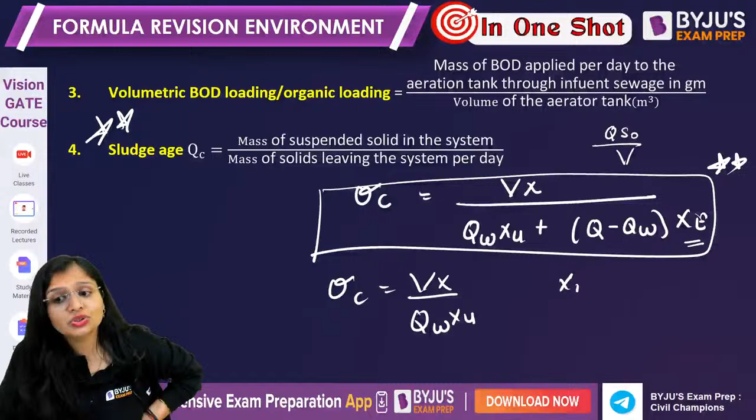If in the question they are giving you the XE value, and you don't remember the full formula but apply this one, this will become wrong. So kindly remember this formula. This you use when XE is zero or XE is neglected. Okay, so that is the reason. Use this formula.

Next is sludge volume index. I told you, by default if nothing is mentioned, the unit of sludge volume index is ml per gram. What is the sludge volume index? How much volume is occupied in ml by 1 gram of suspended solids when you allow them to settle for 30 minutes. Generally the suspended solids you get in mg per liter, so when you convert into grams, 10 raised to power minus 3 will go above. So generally you remember it like this.

Listen carefully, otherwise you will make mistakes by rote learning VOB upon XOB into 1000. Remember what I have written here: this is ml, this is mg per liter. If in the question they have directly given you the suspended solids in gram per liter, then don't multiply by 10 raised to power 3. Let me write this too. If they have directly given you the weight of suspended solids, don't write it.

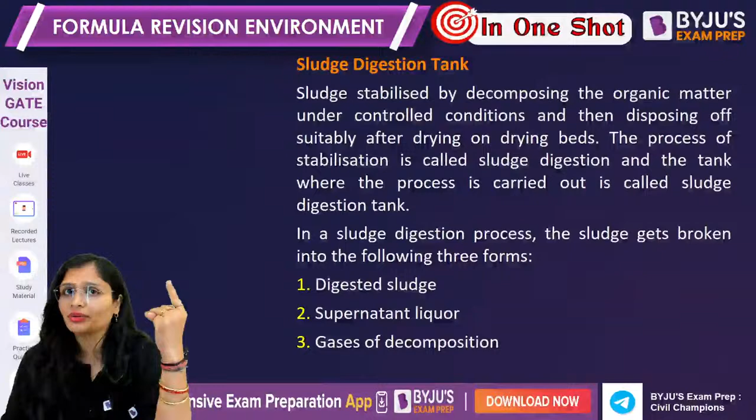Clear? Fine. Now we have sludge digestion tanks. Sludge digestion is a process in which we reduce the moisture content. Once we pass it through sludge thickening tanks, we take it to the sludge digestion tank. We will reduce the volume there. It gets converted into solids, liquids and gases: you get digested sludge, supernatant liquor, and gases.

So here basically 3 stages are there. This is the sequence, the chronology; it has been asked in some exams to arrange it. Acid fermentation, acid regression, alkaline fermentation. First acid formers will come. They will convert it into acids and alcohols of lower molecular weight. In acid regression, you will get supernatant liquor which has high BOD concentration, 1500 to 3000 ppm. You will send it back to PST.

Alkaline fermentation: methane formers will come. Methane formers are pH sensitive. They are very delicate; they work in a narrow pH range of 6.5 to 7.5. Here the acids and alcohols of lower molecular weight will be fed on by methane formers and they will convert them into gases, predominantly methane and carbon dioxide. Generally 65% is methane and the rest is carbon dioxide and other inert gases.

Here only two formulas are important if they ask you to calculate the volume of the sludge digestion tank. What is the volume of sludge coming into the sludge digestion tank and what is the volume of sludge going out? Remember, very important thing.

My voice is not coming now.

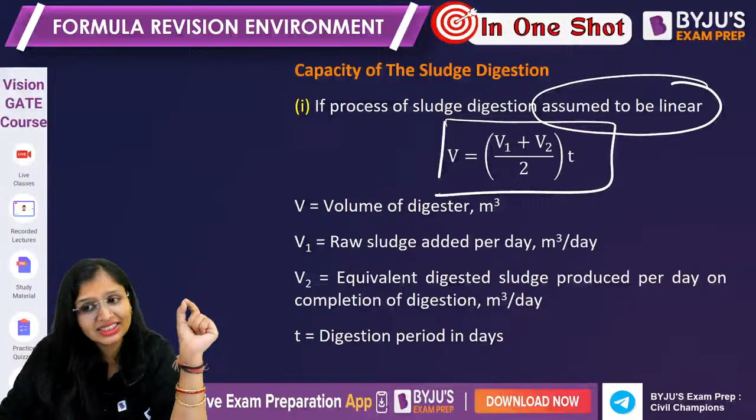If the question tells you to assume the process of sludge digestion to be linear, then apply this formula. If it tells you to assume it to be parabolic, then apply this formula. T is the time for which you are carrying out the digestion. If monsoon, the rainy season, is there, you cannot carry out the disposal of the digested sludge, so you have to make extra space so that the digested sludge remains.

Ma'am, how do we know? In the question, if they mention a monsoon period, they are asking you to include it. So it is V2 into T. And monsoon storage here is also V2 into T, where T is the monsoon period, for how many days the monsoon goes on. And this T is for the digestion period.

Digestion period. Now, septic tank and Imhoff tank. Septic tank is an anaerobic suspended growth process. Imhoff tank is also an anaerobic suspended growth process. It itself acts as a complete treatment unit. Organic suspended solids are removed, digestion of sludge takes place, and even organic dissolved solids are treated. It itself acts as a complete treatment unit. Generally, 12 to 36 hours is provided. After that, you dispose it in absorption trenches, dispersion trenches, and soak pits.

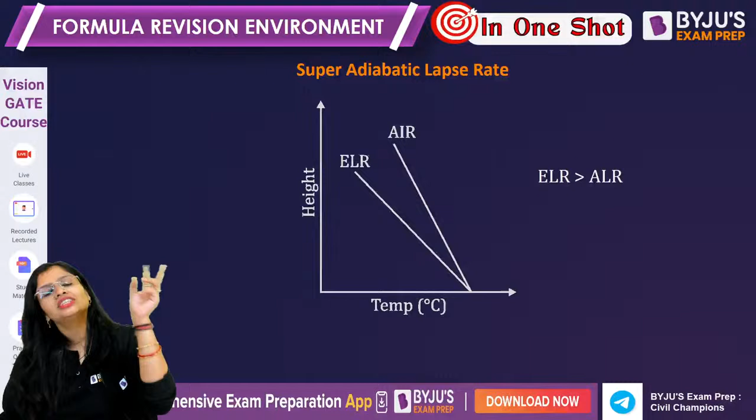Lapse rate: as the altitude increases, the temperature decreases. The rate at which temperature decreases with increase in altitude is called lapse rate. Environmental lapse rate is when the temperature of the surrounding air decreases with increase in height - this is environmental lapse rate. It is not fixed, it varies from place to place. Adiabatic lapse rate is when the temperature of the air parcel or pollutants decreases with increase in altitude, called adiabatic lapse rate. Adiabatic lapse rate is constant.

Generally, there are two adiabatic lapse rates: dry adiabatic lapse rate and wet adiabatic lapse rate. If nothing is mentioned, it refers to the dry adiabatic lapse rate, which takes place below the clouds and is 9.8 degrees Celsius per kilometer. Wet adiabatic lapse rate takes place above the clouds and is 6 degrees Celsius per kilometer.

Super adiabatic lapse rate is the lapse rate when environmental lapse rate (ELR) is more than adiabatic lapse rate (ALR). In both cases temperature decreases, but the rate of decrease is more for the surrounding air. If you calculate the slope, you're calculating x by y. So remember, ELR will be more than ALR. This is called super adiabatic lapse rate, or unstable environment, because here mixing of pollutants takes place.

Then comes sub adiabatic lapse rate. In sub adiabatic lapse rate, you call it a stable environment, because here mixing of pollutants will not take place. So here ALR will be more than ELR. That is your stable environment.

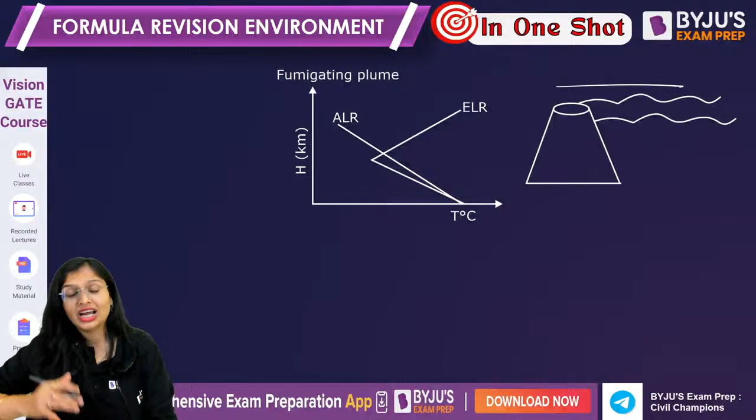Opposite, if inversion takes place afterwards, it becomes the worst condition, called fumigating plume, because the pollutants will remain inside, near the earth's surface. This is a very brutal condition because pollutants will be there and we will be inhaling that. So the best is lofting, worst is fumigating.

In lofting, first inversion, then unstable. In fumigating, first unstable, then inversion.

So this is one formula for height of the chimney. If in the question both particulate matter and sulfur dioxide are given, whichever value is maximum, you take that value to design the chimney. Only thing to remember is the units: for particulate matter it is in tons per hour, and for sulfur dioxide it is in kg per hour.

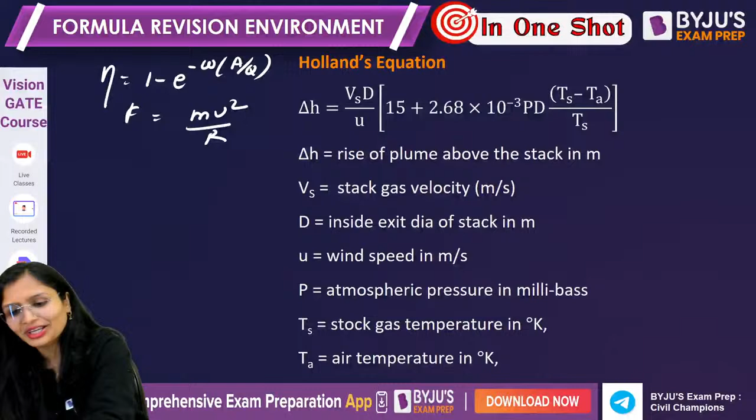और तुम 11 बजेगा. चलो कल आ रहे हो ना? एवरीबडी इज कमिंग टुमारो फॉर एनालिटिकल. डर लग रहा है? अरे यार डर सबको लगता है. एनवायरमेंट टफ नहीं है यार, एनवायरमेंट से तो प्यार करना चाहिए, इतनी अच्छी चीज है ये.

नहीं है. हाइड्रोलॉजी से एक डाउट था, पूछ लेना मेरे से टेलीग्राम पर पर्सनली. अभी मैं कर रही हूँ समथिंग ऑफ एस कर्व, ठीक है.